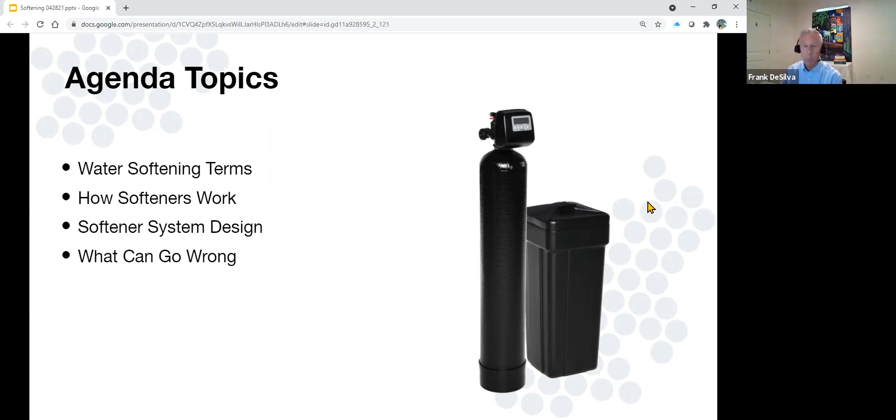First, water softener terms. When I was in 4th grade, we studied the metric system because we were told everything was going to be converted to the metric system. Of course, that never happened. And here we are, measuring resin in cubic feet, water in gallons, capacity in kilograins per cubic foot, hardness in grains per gallon, regenerant as pounds per cubic foot. But leave the driving to us, we'll explain this all to you and keep these softener calculations understandable and easy to do.

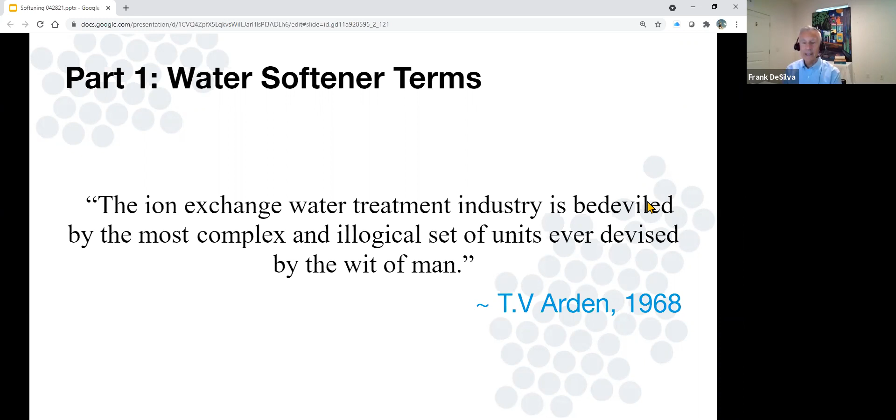First, the most basic definition: cations are positively charged, anions are negatively charged. Ion exchange is all about dissolved ions in water, and those dissolved ions have charges.

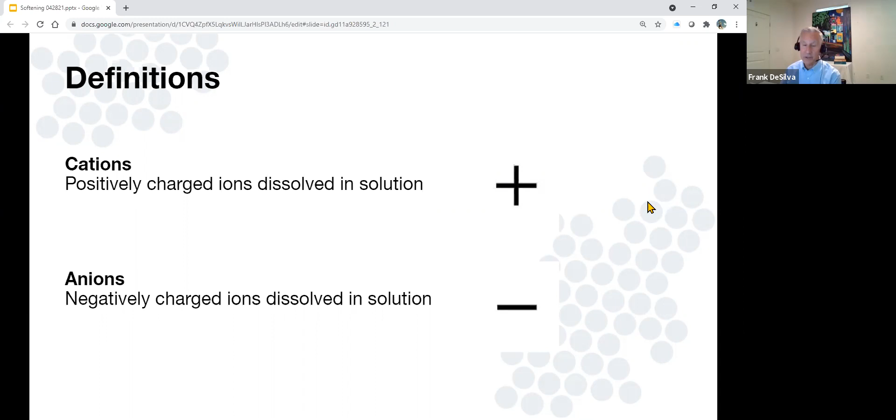Whenever I talk about any concept in ion exchange, I like to start out with the basic water analysis. Most all naturally occurring water sources contain these cations: calcium, magnesium, and sodium. They also contain sulfate, chloride, and alkalinity on the anion side. Other not-so-common cations can include potassium, iron, manganese, possibly even copper and zinc. But of course, for softening, we're concerned with calcium and magnesium.

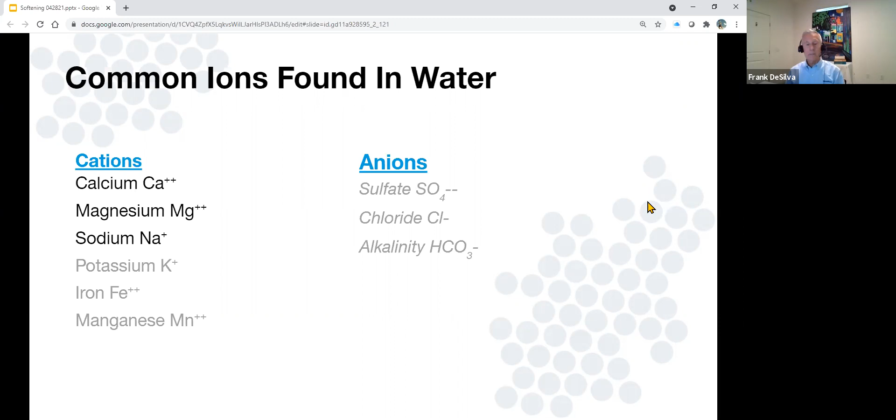So, how do softeners work?

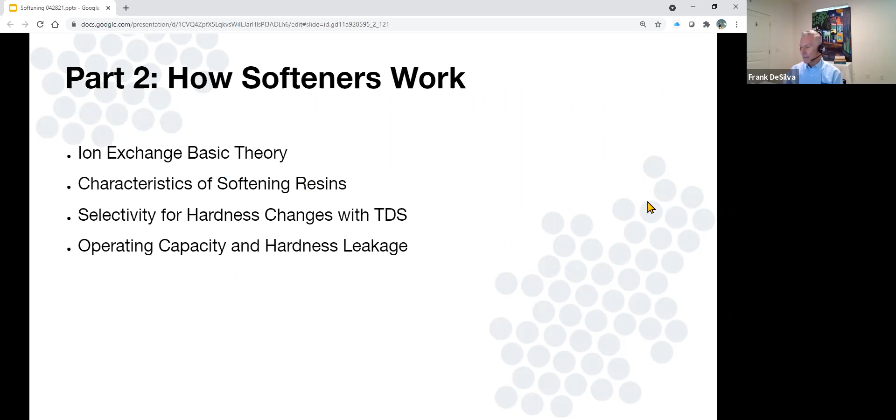Ion exchange resins are little plastic beads that take ions out of water and put other ions back in. We're removing objectionable ions and replacing them with ions that we hope are, if not preferable, at least tolerable. In the case of softening, we're removing calcium and magnesium and replacing it with sodium. The sodium salts that are formed are highly soluble, so scaling is minimized. Also, the absence of hardness ions makes water easier to react with soap. It's easier to make suds and to clean.

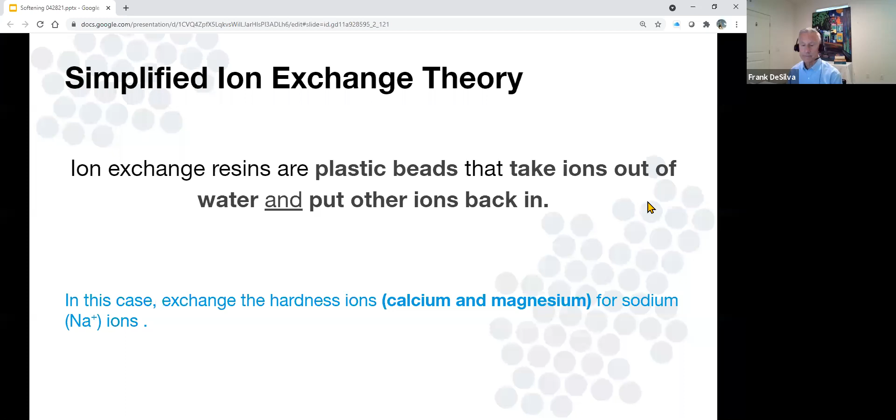How a softener works: most softeners are operated in downflow operation in a pressure vessel that has a packed bed of ion exchange resins with freeboard above them. Now, some important concepts here. The hard water enters the vessel and gets distributed across the resin bed.

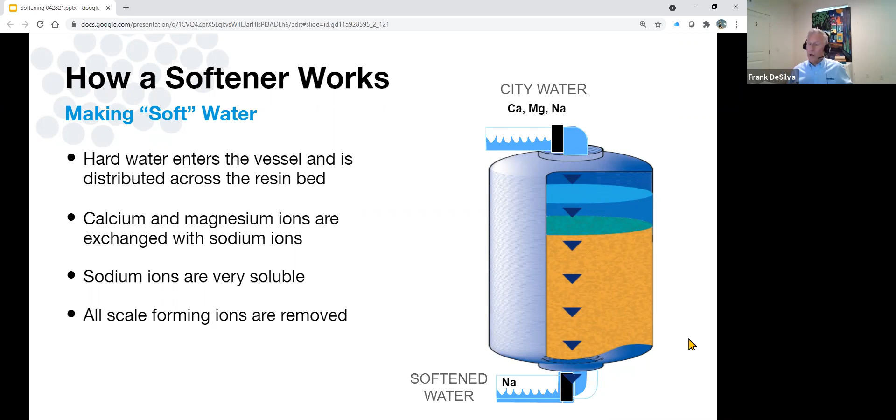As the ions proceed through the bed, the calcium and magnesium ions are exchanged with the sodium ions, which are very soluble. The TDS here is unchanged. The cation profile of the raw water is calcium, magnesium, and sodium. The softened water is all sodium, so we've changed the cation profile of the water. We have not changed the anion chemistry at all—the sulfate, the alkalinity, and the chloride levels are the same coming out of the softener as they are going in.

Why is water softening so efficient? At relatively low TDS and normal TDS levels that we see in drinking water supplies, the selectivity for hardness is very high—the resin likes calcium and magnesium a lot more than it likes sodium. This is primarily due to valence. If we look at it simply, the calcium and magnesium each have a valence of two positive charges, whereas sodium only has one.

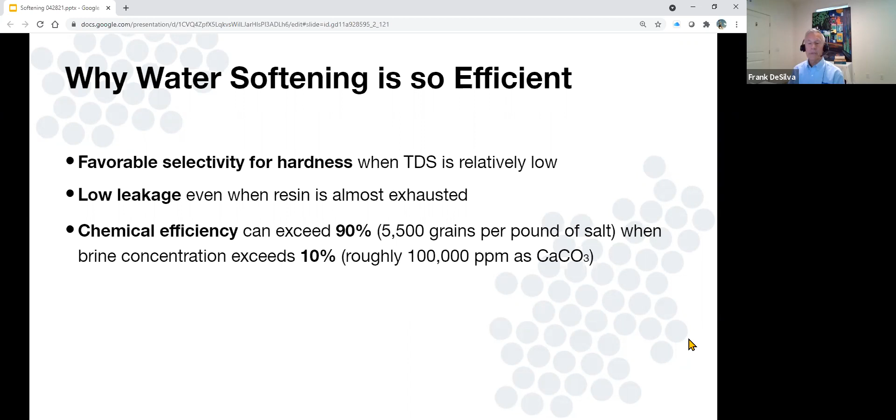Low hardness leakage from the resin is achievable with softeners, and it can be quite chemically efficient, meaning that the amount of salt we use to remove a given amount of grains of hardness is minimized.

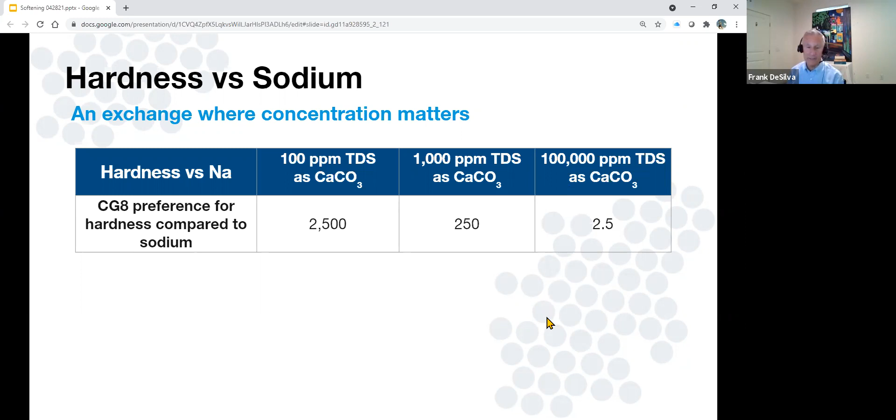Here's a chart that shows what this preference actually is numerically. For example, a water with a TDS of 100, an 8% cation resin has a preference for hardness of 2,500 times more than sodium. Now, as we increase the TDS—bump it up to 1,000, or see a water with 100,000—you can see the ion exchange reaction, the standard softening ion exchange reaction, is a lot less effective because that selectivity or preference goes down.

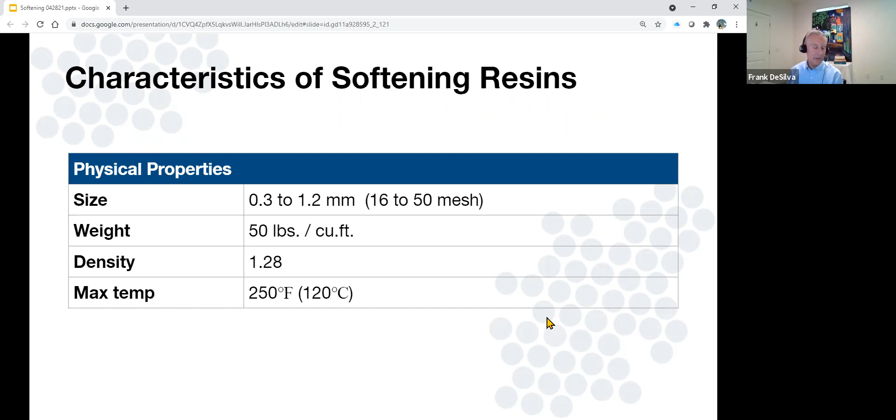What does a softening resin look like? It's about 0.5 millimeter in diameter, a perfect round sphere. This is an 8% cross-linked cation resin example, the most common of course. The weight is about 50 pounds a cubic foot, the density is 1.28—it sinks in water, it sinks in concentrated brine. Maximum temperature it should be exposed to is about 250 degrees Fahrenheit.

The total capacity as measured in a laboratory for an 8% cross-linked resin is 44,000 grains per cubic foot, and we're going to be talking about these capacities later on. Don't let that number throw you off, because I'm sure it's not one that you're familiar with if you deal with operating capacities. Important concept: in the laboratory, we're measuring the complete total capacity of that ion exchange material. Operating capacity is the capacity of the resin when it's in use.

I mentioned we're talking about an 8% cross-linked resin here. The cross-linking is made of divinyl benzene, commonly referred to as DVB, and it gives the resin bead its strength. This is a strongly acidic cation resin, also referred to as a sulfonated benzene sulfonate or sulfonated styrene divinyl benzene copolymer. The ionic form we use this resin in, in nearly all cases for softening, is the sodium form.

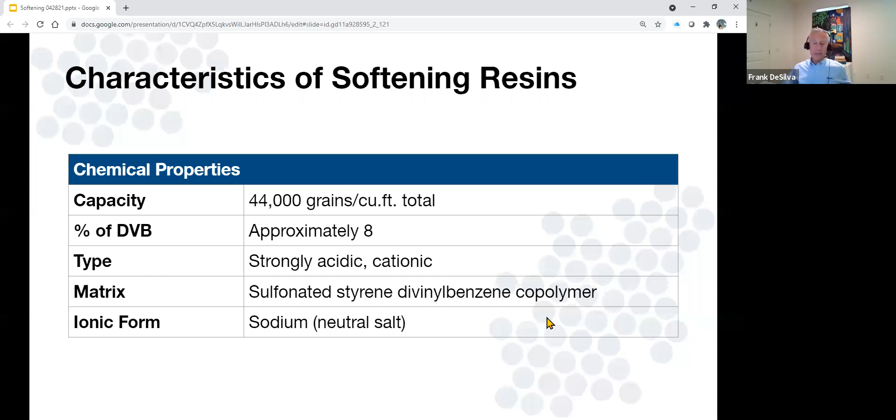What types of strong acid cation resins are available for softening? The standard cation is an 8% cross-linked industrial quality cation resin. There's also 10% cross-linked—more divinyl benzene, which makes the beads stronger and more resistant to oxidation. These 8% or 10% cation resins are available in either black or amber color. Aside from the color, these resins are identical in terms of physical, chemical, and operating properties. The only difference is the color.

So it's your preference. Macroporous cation can be used in some extreme conditions. A macroporous cation has a cross-linking of greater than 12%, up to 15 or 16%, and the way it's manufactured leaves it with discrete pores in the bead—it's like a Swiss cheese. So although it's stronger, because you have holes in the bead there's less plastic, consequently lower capacity, about 15% lower.

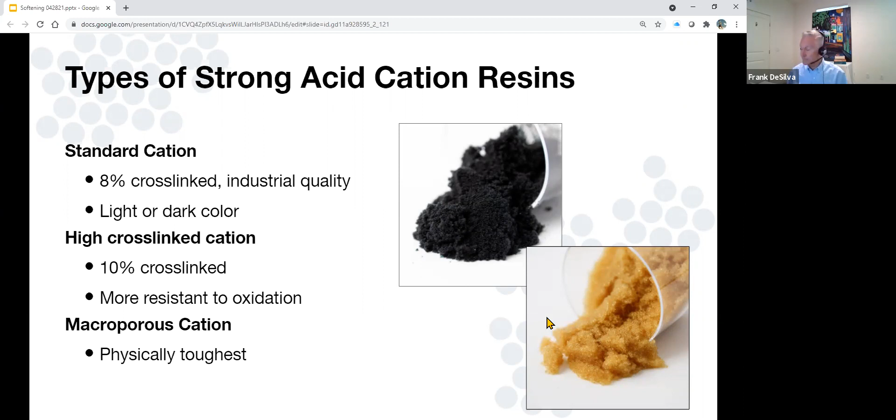There are some specialty cation resins also used in the softening process. Fine mesh: a fine mesh resin is about 30 to 60 mesh in size. Standard cation resin, I should mention, is 16 to 50 mesh, or 0.3 to 1.2 millimeters.

30 to 60 mesh is the size of the fine mesh. It's got a greater surface area, a shorter ionic path. Most of the exchange sites in an ion exchange resin are inside the bead, greater than 95%. It's not a surface phenomenon. The ions have to get in and they have to get out for the process to work. So of course, a smaller bead has a shorter kinetic path for the ions, and you have that advantage using a fine mesh.

Fine mesh is used in some of the high capacity brine efficient units. It's also useful in iron containing waters. However, it has a higher pressure drop because it's a finer medium. So it has its limitations there.

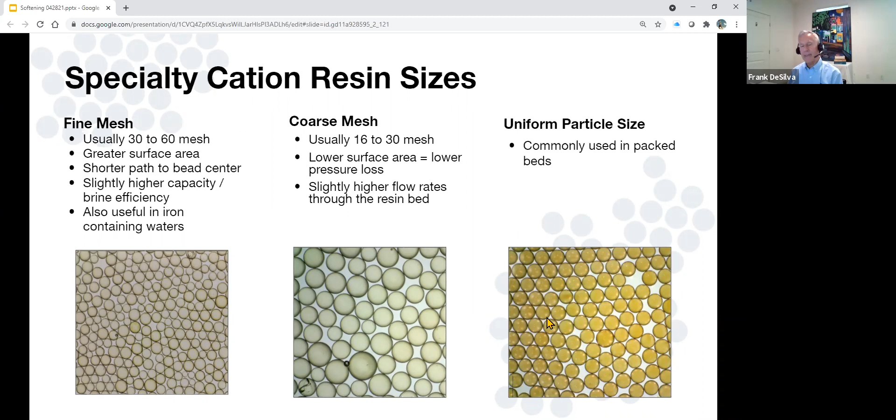Coarse mesh, 16 to 30 mesh, bigger beads, bigger space between the beads. That space is called the interstitial bed volume. Used in higher flow rates, it's a little less efficient in terms of the brine conversion and rinsing and that sort of thing because the beads are bigger, the kinetic path is longer. But this is primarily used when you need to accommodate a higher flow rate. And also we find uniform particle size in some softening applications. Packed beds often use it, and extra deep beds sometimes use uniform particle size resins.

Capacity and leakage rules of thumb. Now, a few slides earlier, I mentioned a total capacity of 44,000 grains per cubic foot, or divide that by 1,000, it's 44 kilograins per cubic foot.

Let's talk about operating capacity now. Here's a range of different dosages of salt, of brine on the resin: 6 pounds per cubic foot, 10 pounds per cubic foot, and 15 pounds per cubic foot. And we have different capacity ranges at each one of those dosages. The most common rule of thumb for softener capacity is at 15 pounds per cubic foot of brine dosage, you can expect 30 kilograins or 30,000 grains per cubic foot.

Now, the ranges that we give here are explained in the notes. The lower TDS gives a higher capacity and lower leakage. The higher TDS, and we're talking about background TDS, the higher TDS gives lower capacities and higher hardness leakage during the run. Let's look at those average leakage numbers.

At the low dosage, you can see that's a pretty high leakage, 5 to 15 parts per million, depending on the condition of the water. Higher dosage, of course, will get you down to a lower leakage of 1 to 3. What happens when you need lower than that? There's many boiler feed operations that need 0.1 part per million hardness leakage. Well, in those cases, we go to countercurrent regeneration or perhaps a lead lag unit. We'll get into that a little bit more.

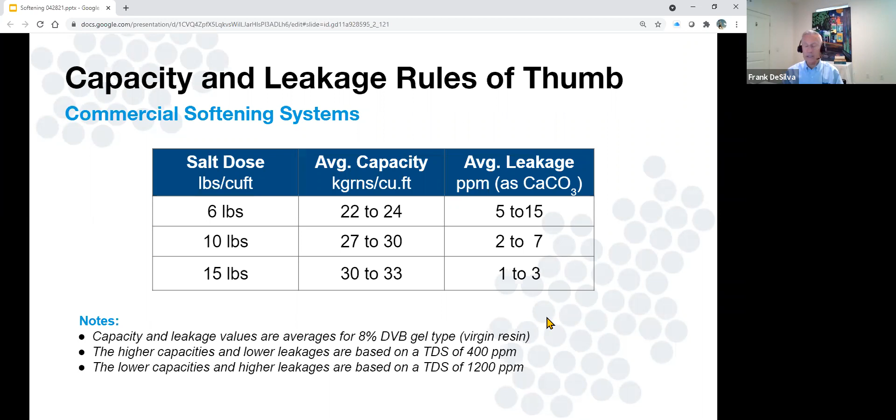A note here about efficiency. At the lower dosage, we're more brine efficient. At the higher dosage, we're less brine efficient. That is the amount of brine you use to remove the hardness.

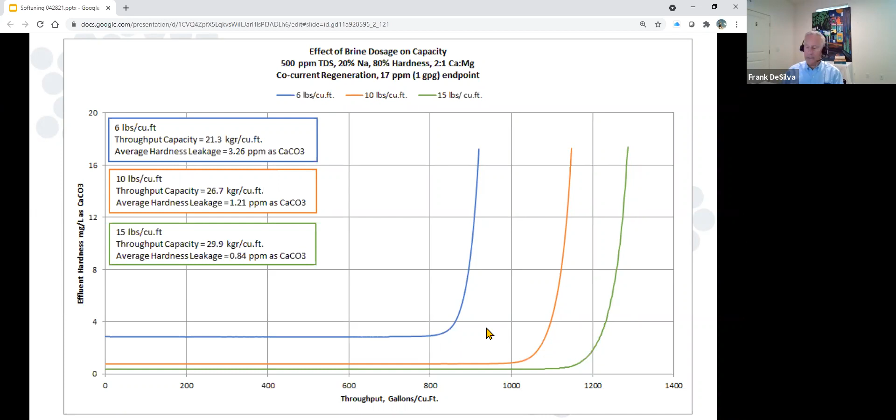Here's another graph showing the hardness leakage versus the TDS versus the salt dose. And here's our dose on the x-axis from low to high. And you can really see the effect on this graph of the high TDS waters. Look at the 1,000 TDS. It's hard to get leakage down below 5 parts per million unless you go to some pretty heavy dosaging. And that's not real efficient in terms of brine consumption. So higher TDS means you have a lower preference, and it's hard to overcome that lower preference. And that results in increased leakage during service.

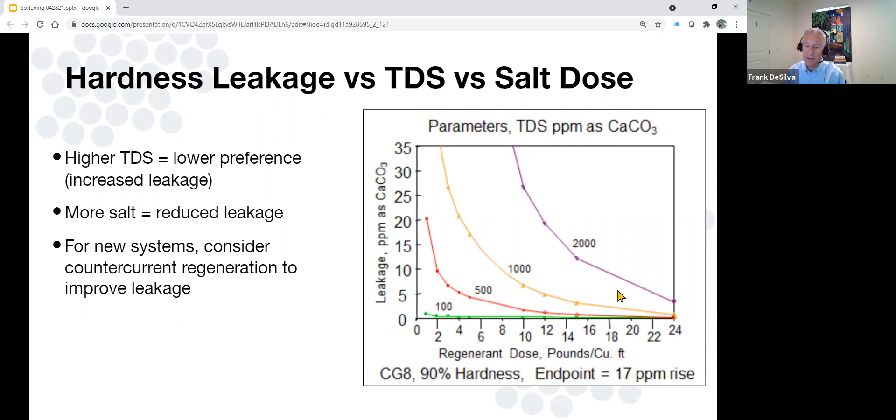More salt, reduced leakage. One big takeaway about today's presentation: the more salt you put on that resin, the lower the leakage, the higher capacity.

One more graph. This is showing the difference between co-current and countercurrent operation. So co-current means that we're introducing the brine in the same direction as the flow. I have some drawings that will show that later on in the presentation. Countercurrent, we introduce the brine opposite to the service flow. And in almost all cases, the service flow is downwards through the vessel, and the brine flow for co-current is in the same direction from the top to the bottom. Countercurrent would be from the bottom to the top.

So what do we get? What benefits do we get from countercurrent? Look at this. We have cut the average hardness leakage in half, down to 0.68 part per million from 1.2, which is the hardness leakage we were getting at a dosage of 10.

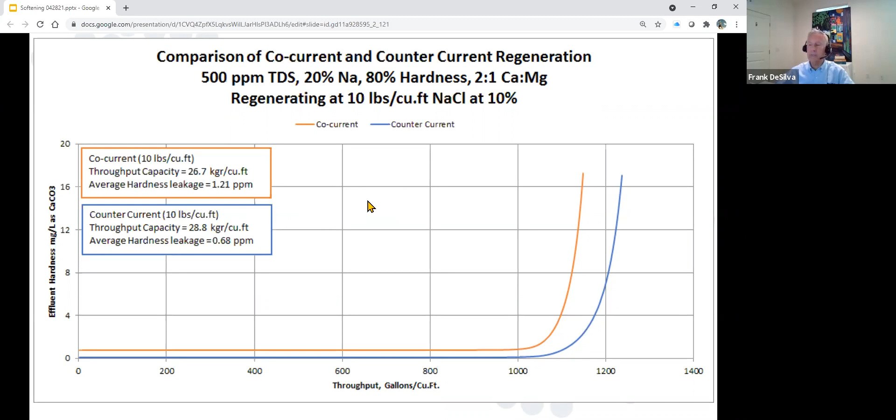I'm going to go through a simple softener design here, an example you can use for either designing new softeners or reviewing a design of a softener that's been in service for a period of time.

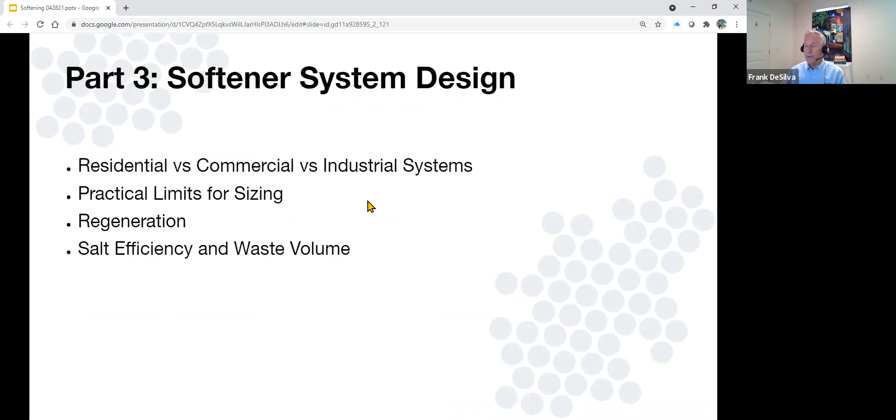First, let's talk about the applications that softeners find themselves in. The definition of the application, or defining the system, is often defined by the application.

Let's talk about the most common by far, residential. In terms of numbers, there are hundreds of thousands of softeners used by households. These systems usually have a pipe size of 3/4 inch or less, and are characterized by high peak flows compared to average flow. Think about the water you use in your home—high peak flow in the morning and evening with showers, washing machines, and dishwashers.

Intermittent usage is another characteristic. Most of these tanks are made out of fiberglass. The resin bed depth is limited by whatever size tank can fit. Salt efficiency is becoming increasingly important for residential units because most discharge brine to municipal sewer, and municipal utilities want us to minimize sodium or chloride discharge. Color, taste, and odor are also very important for residential units, as well as ANSI NSF 61 certification.

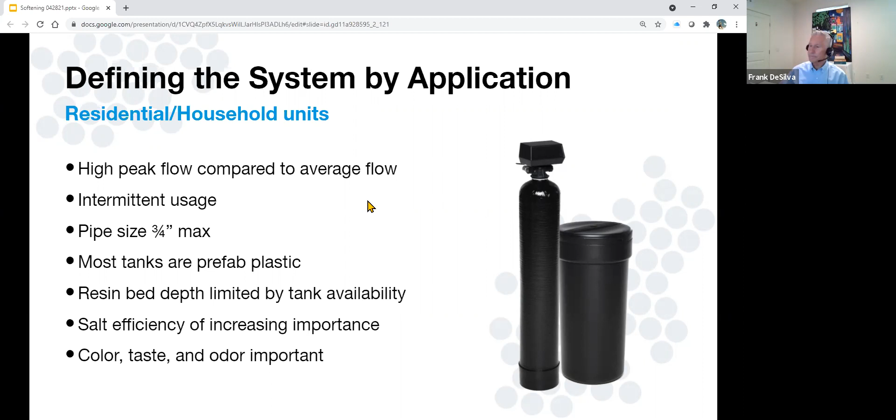Commercial systems are a step up in size, typically about 25 to 50 GPM, maybe even up to 100. They use larger tanks and can be found in institutional settings, restaurants, hotels, laundries, car washes. Throughput capacity is important, and modest hardness leakage is acceptable.

What do all of these applications have in common? Look at this—they all use soaps. So soft water gives them a huge savings in soap consumption.

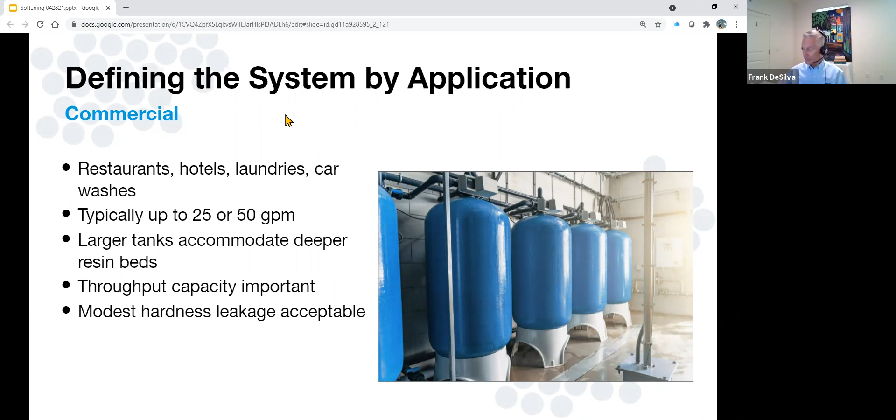Lastly, and the largest applications, are the industrial and municipal applications. Larger vessels, mostly custom built, steel construction, ASME code tanks. Where do we find these? In large factories, boiler water treatment, power plants. These are characterized by high flow rates, continuous operations—it's a critical operation with low hardness leakage requirements.

How do you know a facility has this type of larger softener in it? If they're producing steam—if you're driving through an industrial area and there's steam venting from the roof of that factory—you can bet that steam is venting from a boiler or other heat process. And if they're making steam, they're at a minimum softening the water.

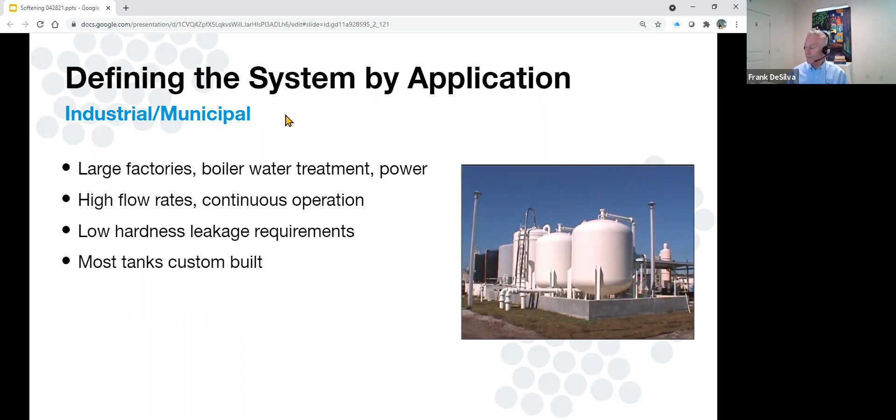What are the practical limits for sizing? If you look at published literature for ion exchange resins, you'll see some pretty wide ranges given—service flow, 1 to 10 gallons per minute per cubic foot. That's pretty wide, so we've narrowed it down here to 2 to 4 gallons per minute per cubic foot preferred. This is called the kinetic flow rate.

This is the contact time—it can be converted to empty bed contact time if you're familiar with that from using carbon. Another flow guidance number we use is gallons per minute per square foot, or the linear flow rate. This is the flow through the cross-section area of the vessel. 2 to 20 is the wide range, but we like to see it around 8 to 12 gallons per minute per square foot.

What are the bed limitations? Bed depth limitations: minimum 2-foot bed depth, maximum 8, probably better off in the range of 4 to 6. The deeper the bed, the better you'll do in terms of ion exchange—taller, skinnier ion exchange beds are almost always better than shorter, squat ones. Pressure loss across the bed can handle 25 pounds per square inch or more, but it's best to keep it below 10 when designing a system.

Inlet contaminants—here's an important concept. Ion exchange resin is a plastic, styrene divinyl benzene, so it does oxidize when in contact with strong oxidants such as chlorine. 0.3 parts per million of free chlorine is considered an acceptable level, but the preferred level on the inlet is 0.

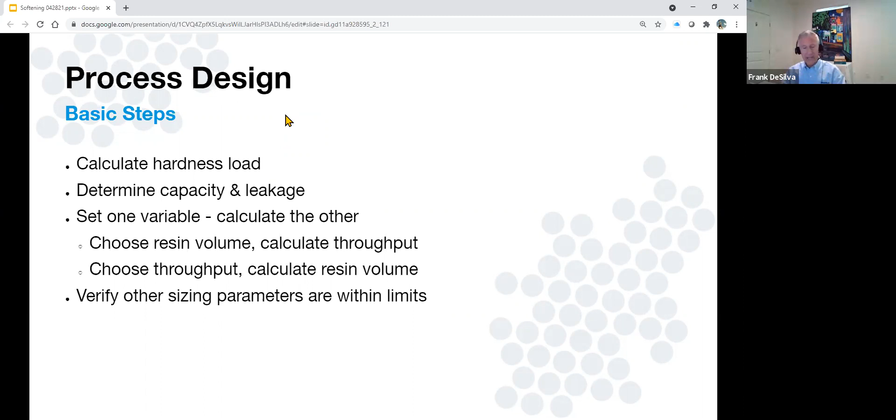Process design. Here's the example we'll go through. There are a couple of ways to approach this. You calculate the hardness load, the grains per gallon of hardness in the influent water, determine the capacity and the leakage, then set one variable and calculate the other. Choose a resin volume and calculate the throughput, or pick the throughput you need, X gallons per day, and calculate the resin volume needed to satisfy that requirement. Once you've sketched out those parameters, check it against the guidelines to see if it all fits. So here's our sizing example.

This situation has 100 gallons per minute of average flow. The hardness in the influent water is 10 grains per gallon. We want 2 full-size softeners, that is 2 100% capacity softeners, so we'll have 1 softener on line and 1 on regeneration or standby. 25 cubic feet of resin is selected, and from the published specifications or a performance projection from the resin supplier, we've determined the capacity of this 8% cross-linked resin on this particular water is 22 kilograins per cubic foot at a 6 pounds per cubic foot salt dose, or 22,000 grains per cubic foot.

I should mention that we regularly perform these performance projections given the water analysis. For softening, it's rather straightforward - we don't need an extensive list of water parameters to do this. Send us the TDS, calcium, magnesium, and sodium, and we'll supply the capacity range over various brine dosages.

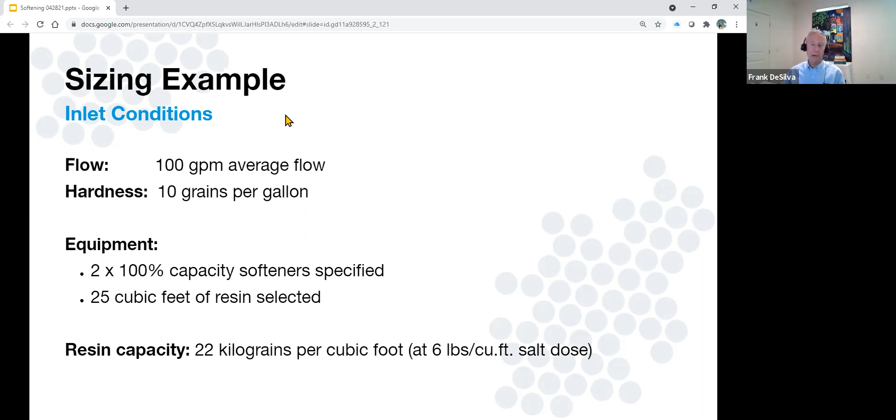Continuing with our sizing example. What is our throughput capacity going to be per vessel? We know we have 25 cubic feet of resin in each vessel, our capacity is 22 kilograins per cubic foot, and we have 10 grains per gallon of hardness in the feed. By that calculation, we find the vessel is capable of 55,000 gallons of softened water between regenerations. How long is that going to last?

Our flow rate is 100 gallons per minute. That converts to 550 minutes, or 9 hours. So you'll be regenerating basically once a day, and this is an acceptable throughput for most factory type settings where the work hours may only be 8 hours a day.

Let's check that vessel size, or firm up the vessel size. We know we want 25 cubic feet in the vessel, and we want at least a 4-foot bed. So divide that 25 cubic feet by 4 feet, and we get a dimensional number of 6.25 square feet. If we go to our chart showing the square footage surface area in different diameter tanks, we see that a 36-inch diameter tank has 7.07 square feet of surface area. So we divide 25 cubic feet by 7.07, and see that our bed depth is 3.5 feet. Perfect. Adding in the freeboard requirements, we'll go with a 36x72 tank, a very common size.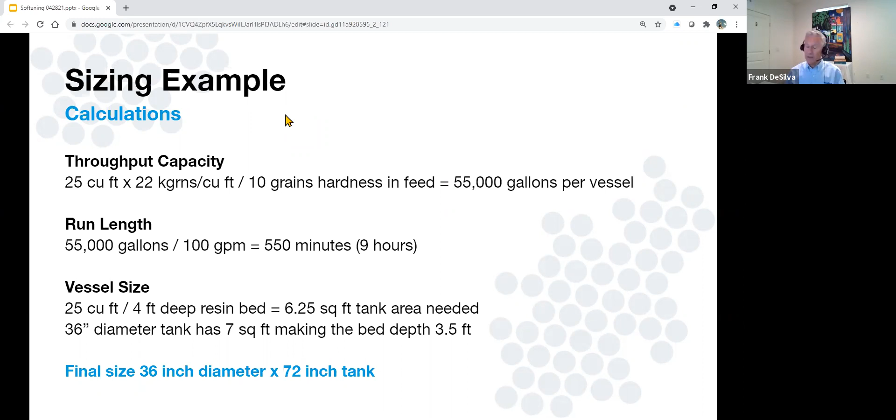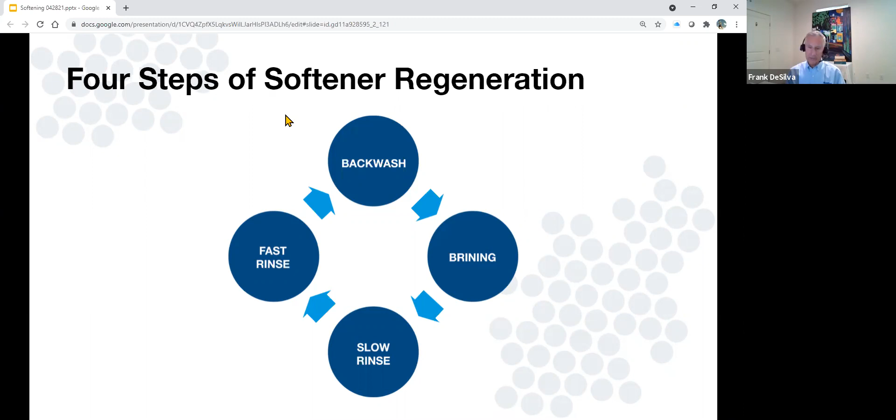When we put the tank in service, it does exhaust because the resin has a finite capacity, and in this case it's going to exhaust in 9 hours, so we need to regenerate. What are the steps of regeneration? Backwash, brine injection, slow rinse, and fast rinse. The backwash fluidizes the bed, classifies the resin beads which helps minimize differential pressure, hopefully gets rid of suspended solids, gets rid of broken beads, and prepares the bed for the introduction of the brine. The backwash usually takes about 10 to 20 minutes, perhaps less on ultra clean water, more on turbid water.

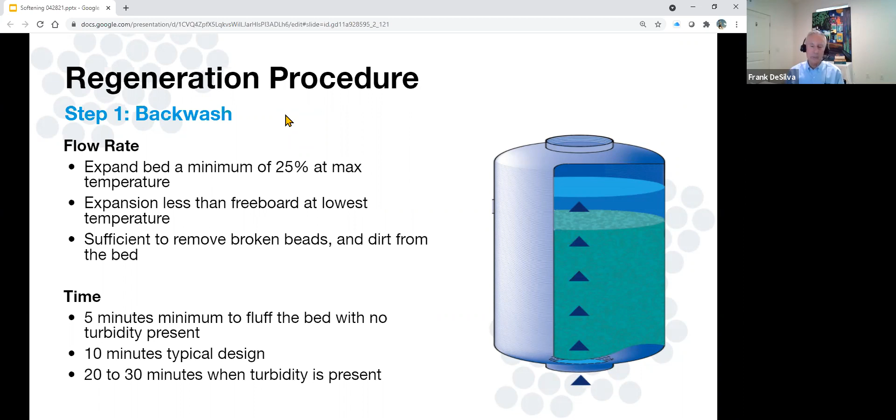Backwash water temperature affects the expansion of the bed. Very important concept here - when I give these seminars live, I always ask the audience: what gives a better backwash, hot water or cold water? Most people get this wrong, because cold water gives you a better backwash. Why? Because cold water is denser, so cold water expands the bed more. Every November at ResinTech, we get emergency orders for softening resin that's been backwashed out of the vessel because they were backwashing at too high a flow rate, and when the water temperature changed with the seasonal variation, they blew resin out of the vessel to waste.

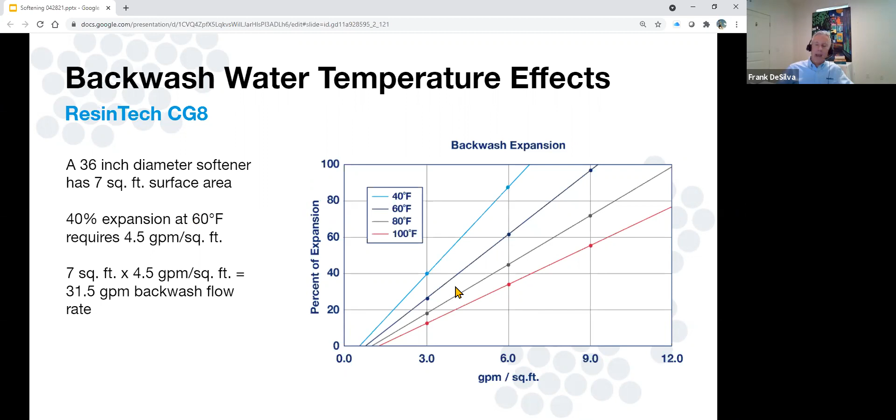We're using 8 to 10% brine here. In our example we're using 10% brine, but you want a minimum of 8%, which correlates to 30% of saturated brine. That adheres to the 30-30 rule: you want 30% of your saturated brine for your dilute brine, and you want to contact the resin for a minimum of 30 minutes. You can't go wrong there.

In our example, we're using co-current regeneration. It's downflow, the same direction as the service flow.

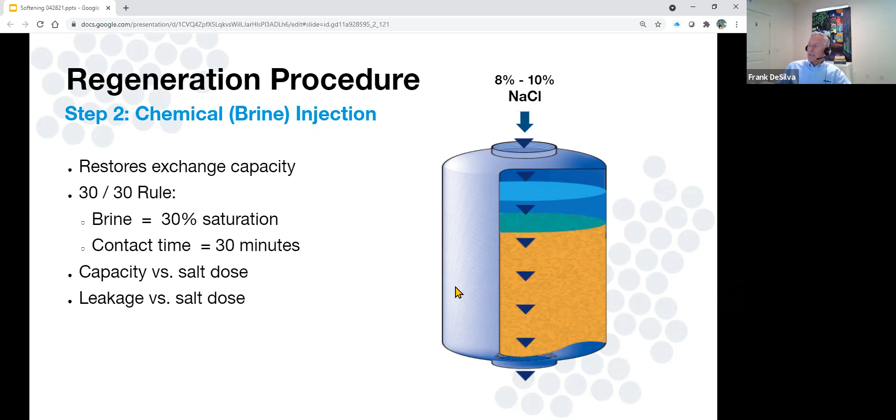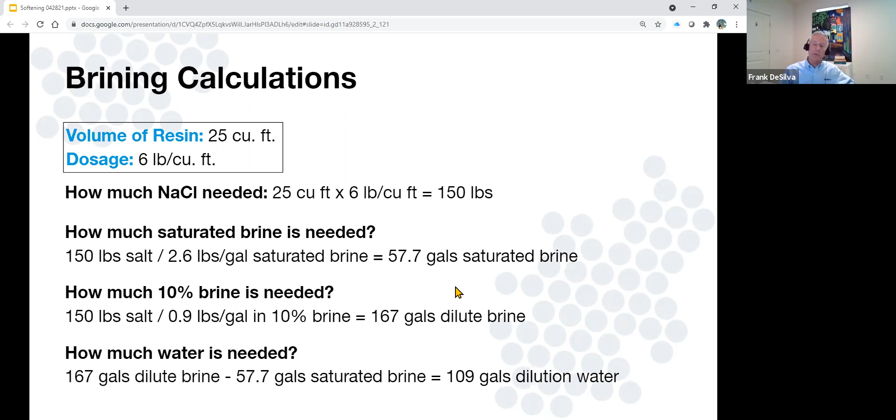Brining calculations: this is how we figured that out. 25 cubic feet times 6 pounds per cubic foot equals 150 pounds. We take that 150 pounds and divide it by how many pounds per gallon are in the saturated brine, and how many pounds per gallon are in the 10% brine. The difference between those two numbers is how much dilution water we'll need.

How do we make the dilute brine? We suck saturated brine out of the brine tank. We get the dilution water from the city water and put that into an eductor. The dilution water is the motive force to suck up the saturated brine, and lo and behold, coming out of that eductor is the 10% dilute brine.

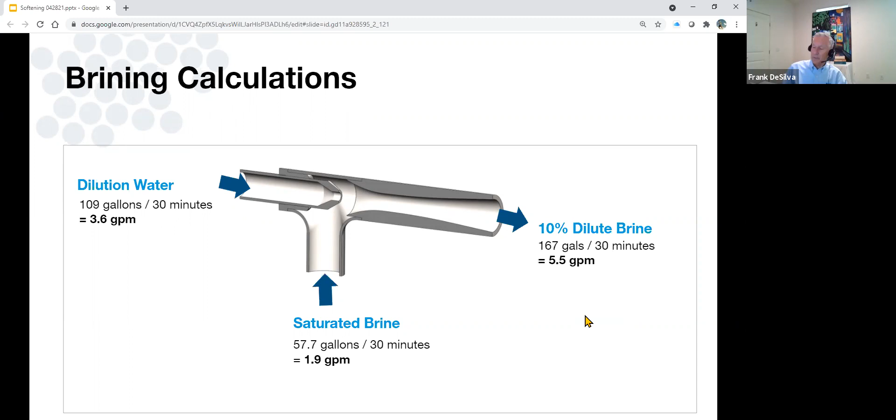What's next? The slow rinse. At the end of the brine introduction, at the end of that 30 minutes, that vessel is full of the best brine the resin is going to see. Most of the work has been done in the first 15 to 20 minutes of the brine introduction. So instead of rinsing out this brine from the tank quickly, we want to bring it down through the bed at the same flow rate that the dilute brine was brought in. This is the slow rinse, or the displacement step, and it usually takes about 30 minutes.

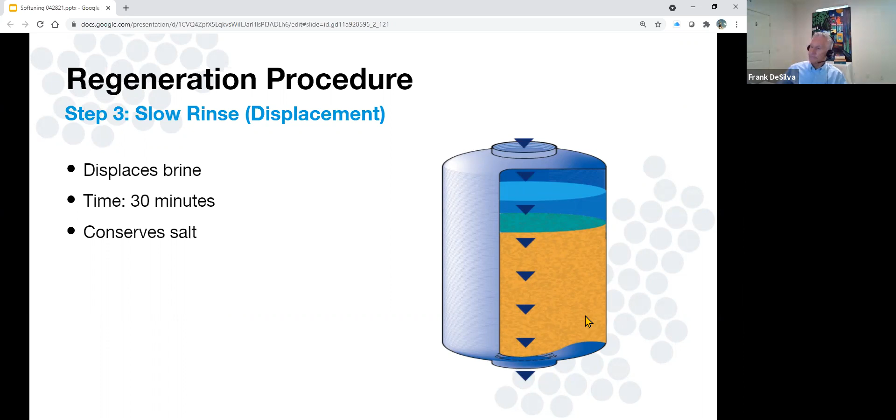Lastly is the fast rinse. This brings us back to quality, gets rid of any traces of salt and hardness, and the unit is ready to go back in service.

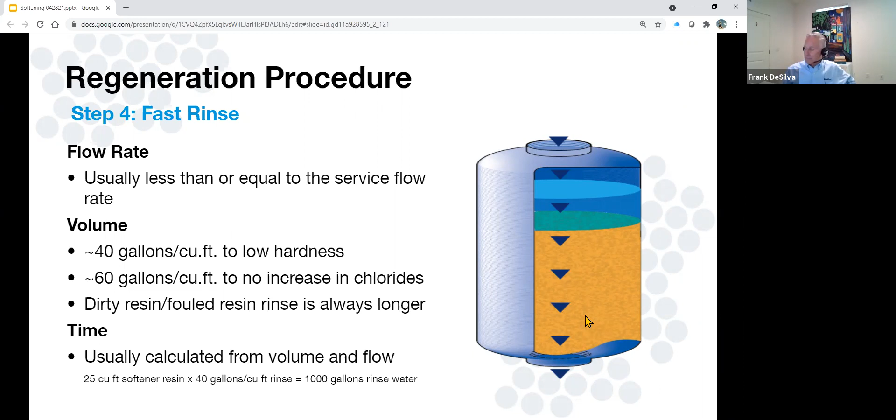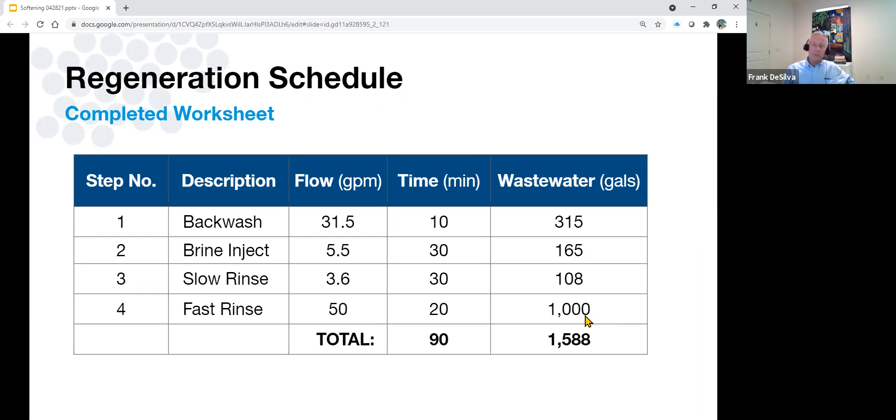Here is our completed worksheet of what I just went through: the backwash, the brine injection, the slow rinse, and the fast rinse. Total time, 90 minutes. Total volume of wastewater, 1,588.

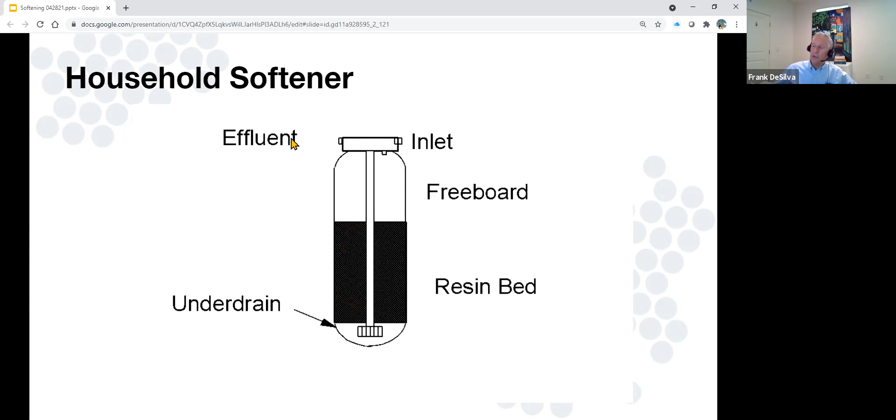Here's a cut diagram of a typical household softener. It has one connection at the top that the head is threaded into. It's got a riser tube that goes down to the bottom, so the water comes in over and through the bed, gets collected by the bottom distributor, up the riser tube, and out to service.

We can sometimes use a separate brine distributor that sits on top of the bed, a few inches above it, so the brine is not diluted when it's initially introduced to the bed. It's a lot more effective.

Softener troubleshooting: what can go wrong? What do we experience in softeners? Of course, if we were live, these are questions I would pose to the audience. What problems have you seen out there?

I'm sure if you've been around softeners for a period of time, you've seen high pressure drop. High pressure drop is most commonly caused by solids buildup—if you're not backwashing those solids out, they build up on the resin, and just like any other filter, that increases the pressure drop. Also, resin oxidation makes the resin beads softer; they can deform under pressure, flatten out and pancake instead of staying round, and you're going to get a higher pressure drop.

Short runs, meaning you're seeing lower capacity than expected, could be caused by lost resin during backwash, or through degradation where the resin beads break and you backwash them out. You could also have low resin capacity through oxidation or fouling.

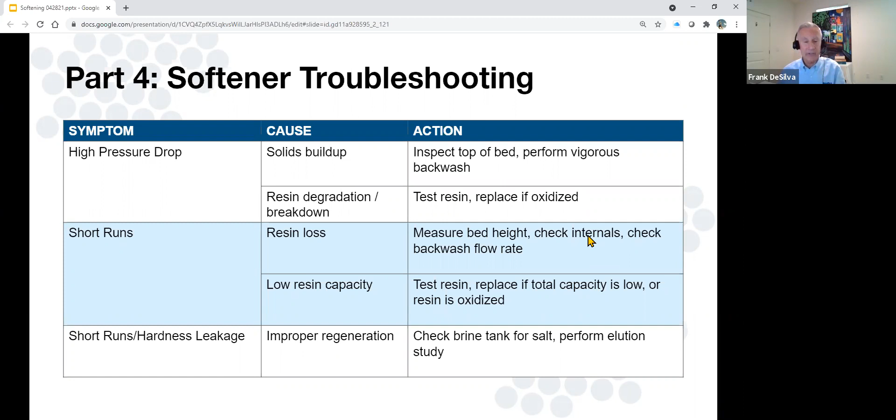Steps to troubleshooting: review the regeneration procedure. Are the flows and times what they need to be? Recalculate the throughput and the leakage based on current conditions. What do I mean by current conditions?

I remember being in a 100-year-old textile mill in North Carolina some years ago, and the softener they had in there was decades old. Let's say it was 30 years old. Well, that softener was designed on a water analysis taken 31 years ago. You think the water analysis has changed over 31 years? Of course it has.

So it's important to look at what the current conditions are. What is that softener that was designed for an older water analysis? How does it behave in the current water analysis? So when we make those comparisons, we calculate our results on the current conditions and compare it to the actual field results. Do they match? If they don't match, let's find out why.

Always a good idea in the larger units to take a resin sample for analysis. The ResinTech laboratory can perform those tests. I'll tell you more on that in just a few minutes.

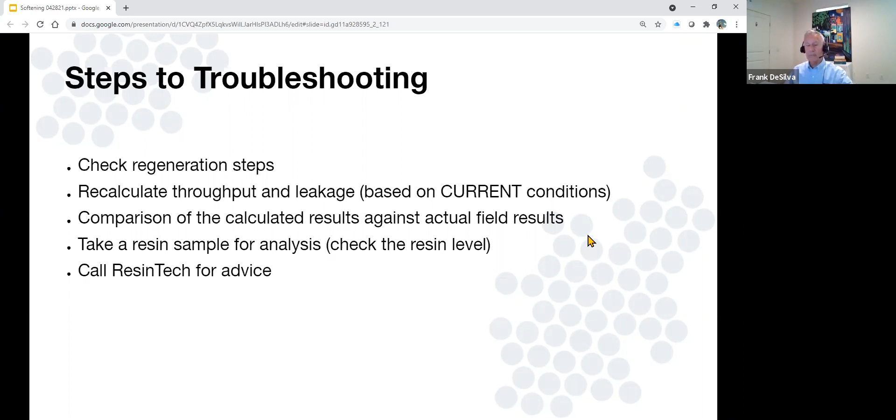What do we need to know? And this does not only go for the troubleshooting aspect of a water softener, but for the design of a water softener as well. What is the TDS? What is the pH and temperature? And it's also good to know the mins and maxes for these parameters.

What is the basic inorganic analysis? The calcium, magnesium, sodium, chloride, alkalinity, sulfate—and yet another shameless plug, ResinTech does provide these water testing services through our laboratory services. Are there oxidants present?

Is there chloramine or chlorine? Are there suspended solids? Another thing to remember here is that a water analysis we obtain is a snapshot of what the water looks like on that particular day. For groundwater sources, there's not a lot of seasonal variance, but for surface water, a lake or a river, you will see seasonal variances.

So it's good to build in some engineering factors when you're designing a new system. And it's also a good thing to keep in mind when we're troubleshooting. This water analysis snapshot—is this really what the softener is seeing day in and day out, month after month?

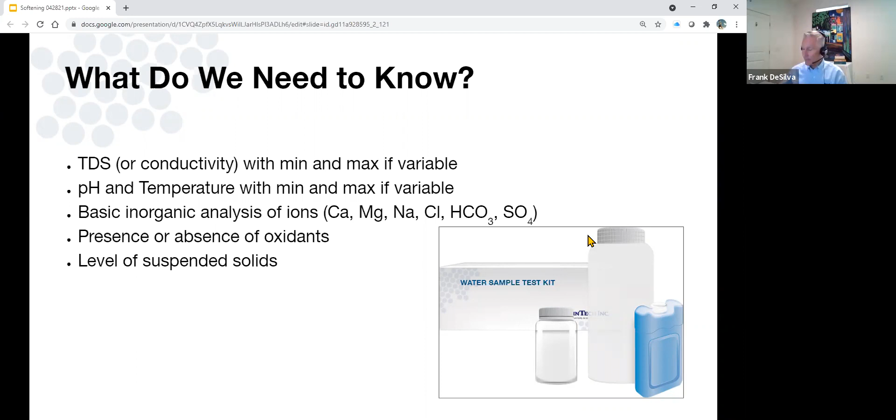Monitoring the performance—this is typically done in the larger industrial and commercial systems. Monitoring the feed water hardness, the effluent hardness, the differential pressure across the bed, and the run length in gallons.

How much salt is being used per regeneration, and how much rinse water is being used? Rinse water can be a good indicator if the resin is fouled. The fouled resin usually requires more rinse water.

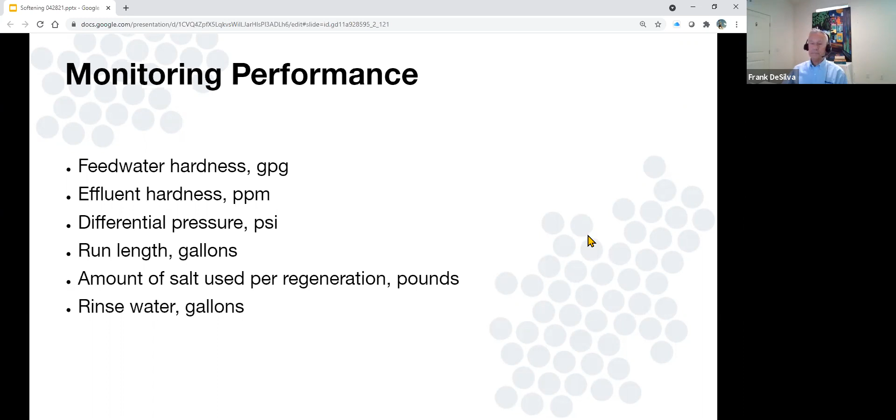Some common mechanical issues are worth mentioning since we're talking about troubleshooting. Keep your approach simple—just like troubleshooting a computer: is it plugged in?

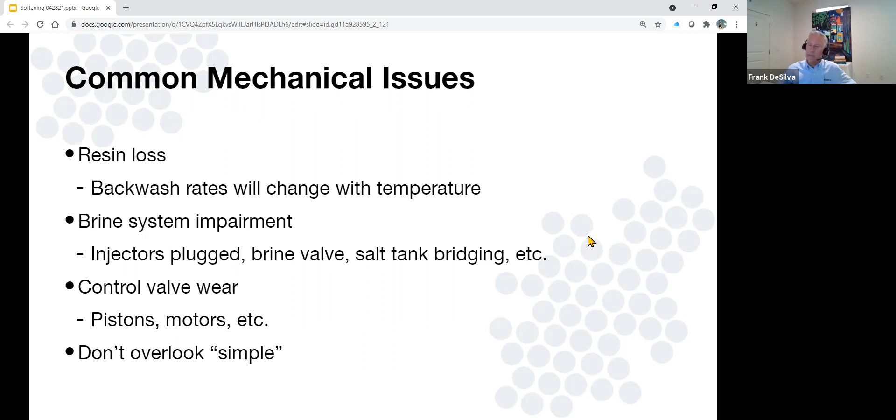Is there salt in the brine tank? Has the system experienced resin loss? Is there some type of impairment with the brine injection system? Is the control valve operating properly? And again, I'll emphasize: don't overlook the simple solutions.

A word about resin fouling. There are different types: physical, chemical, and biological fouling. Physical fouling is the collection of suspended solids and problems with iron. Chemical fouling—iron also has its own form of chemical fouling.

Organic foulants: oils, greases, polyelectrolytes that may have been used upstream. Biological fouling: what is growing in your resin bed—is there mold, algae, or bacteria? This can be a problem with intermittently used softeners or softeners that sit over time.

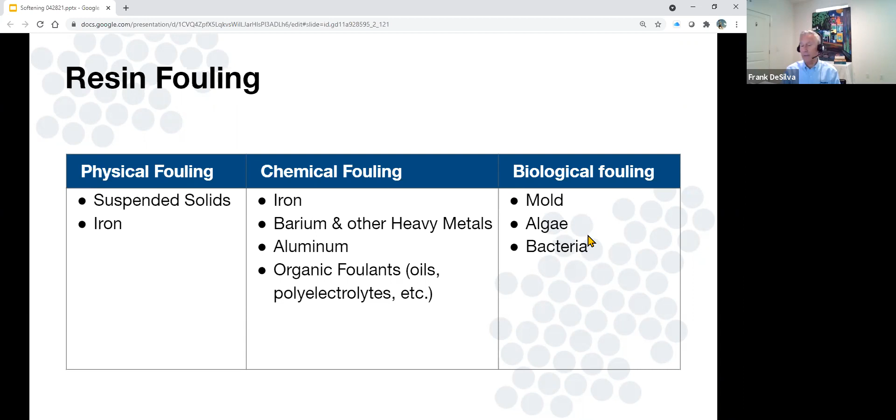Inlet water chlorine guidelines—I touched on this a little bit previously. Chlorine up to 0.3 parts per million isn't much of a problem, but as that chlorine increases, it is a problem, and it will oxidize and de-crosslink that resin, making it softer and eventually breaking the beads.

Here are some photographic examples. Other factors can contribute to this oxidation and almost act like a catalyst in this oxidation reaction: the presence of iron or manganese, higher temperatures. And as we really break down the resin at high chlorine levels, you might even form some trihalomethanes in the effluent of the unit.

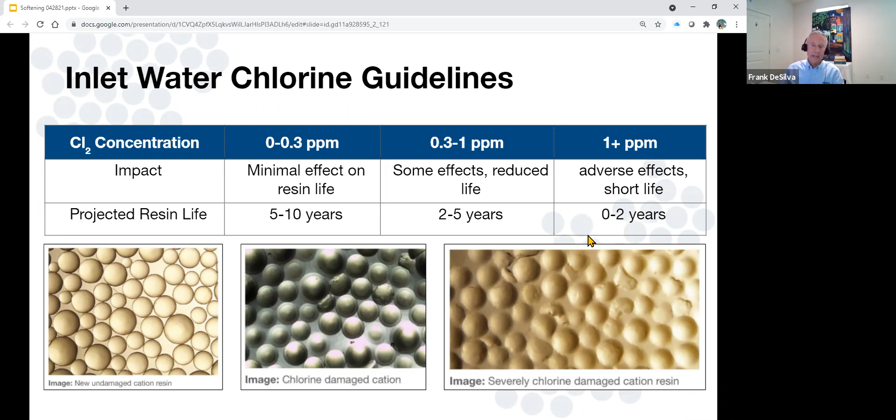Is resin cleaning practical? For physical fouling, it's very practical. Chemical fouling—it's effective, but the chemicals you use to clean may mean you have to do it outside of the vessel because of the materials of construction.

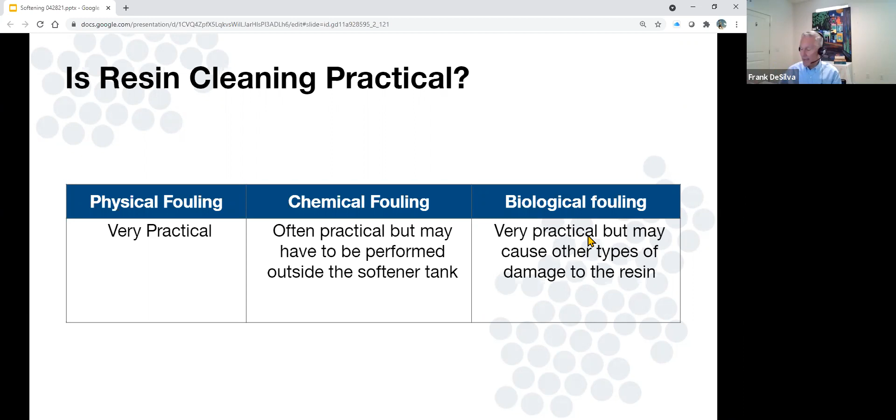Biological fouling—it is practical, but you need to be really careful, because we're talking about applying yet another oxidant to the resin to kill the bugs.

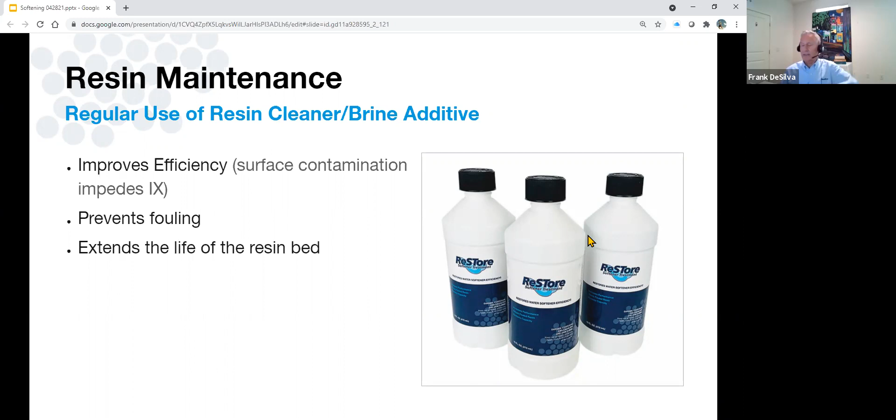ResinTech makes a softener treatment solution called ReStore. In a residential scenario, for example, you can put a quart of this into your brine tank once a month, and it'll prevent iron fouling. It cleans the surface of the bead. It's a good preventive maintenance step to use.

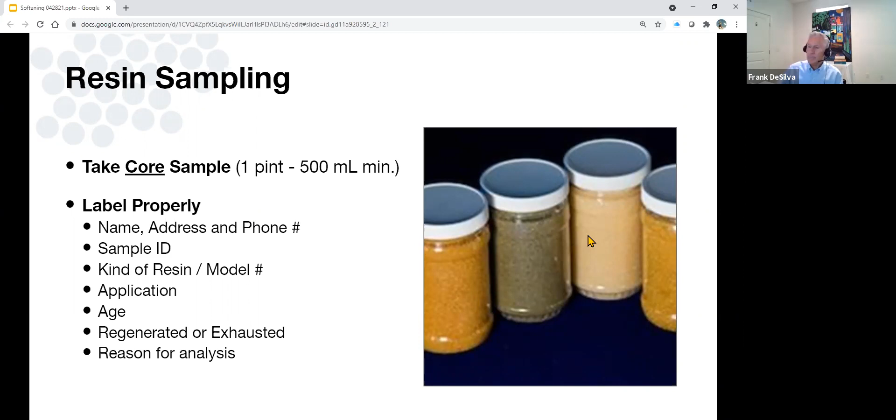We will provide you with a test result that includes capacity, the moisture content, the whole bead count, a nice photograph of the resin beads. We can also do optional tests, including site analysis, the effect cleaning in the field has had, and a screen analysis.

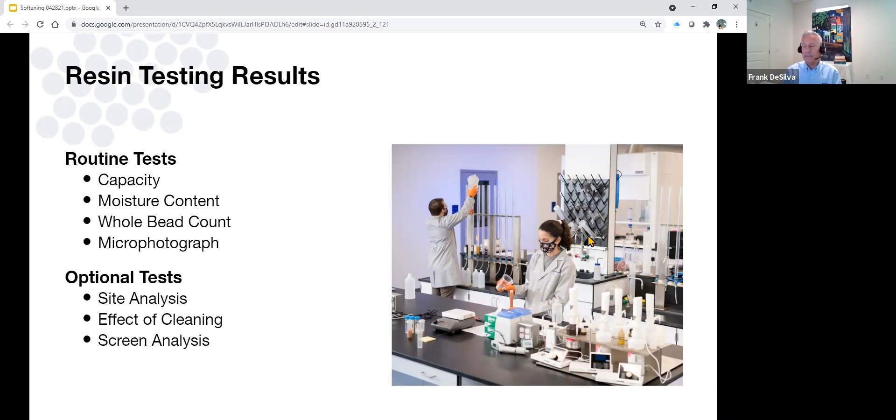So let's review what we've talked about here, especially when it comes to our troubleshooting. Keep it simple in terms of design if you're designing something new.

The commercial industrial softeners that require very low leakage or high throughput may require some assistance from companies like ResinTech. So don't hesitate to call us, send us the water chemistry and what the effluent requirements are. We can calculate the leakage at different dosages and consider countercurrent regeneration.

Remember that TDS influences both capacity and leakage, and those are the things that we can accommodate into our evaluation.

So troubleshooting requires a little bit of detective work. What were the original design specifications? What was the original water analysis? What is the expected performance versus the current conditions? What is the run length and the leakage that you see today?

Resin sample, always a good idea to take. In terms of the larger industrial units, not a bad idea after a year or two of service to pull a resin sample every year. Let's track the progress, or I should say the degradation of that resin, so you can get an expected lifetime estimate.

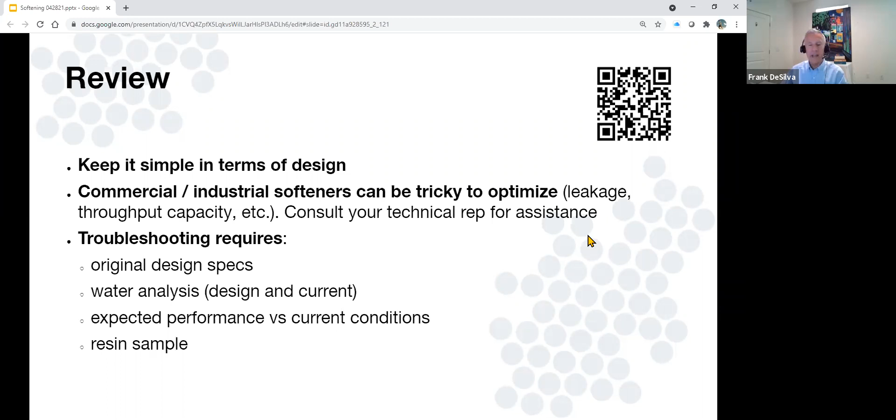Lastly, ongoing maintenance. I mentioned the resin cleaner, that's always a good idea. Do you need to give the resin or the softener a vigorous backwash quarterly or something like that if you have a buildup of suspended solids?

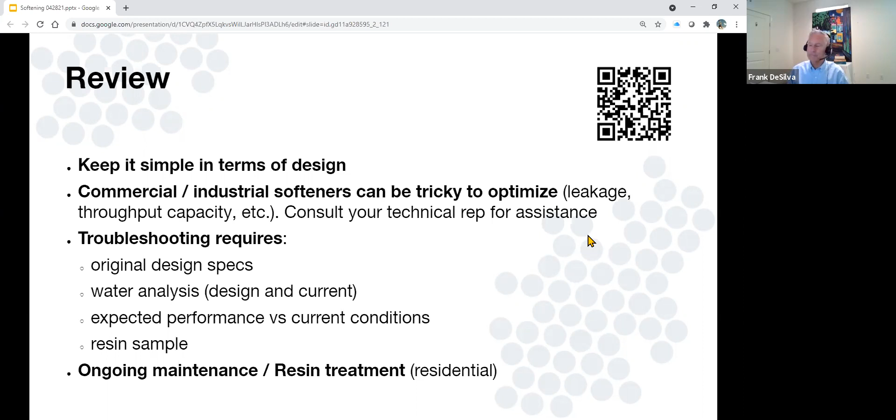But with that, let's see if there's any questions.